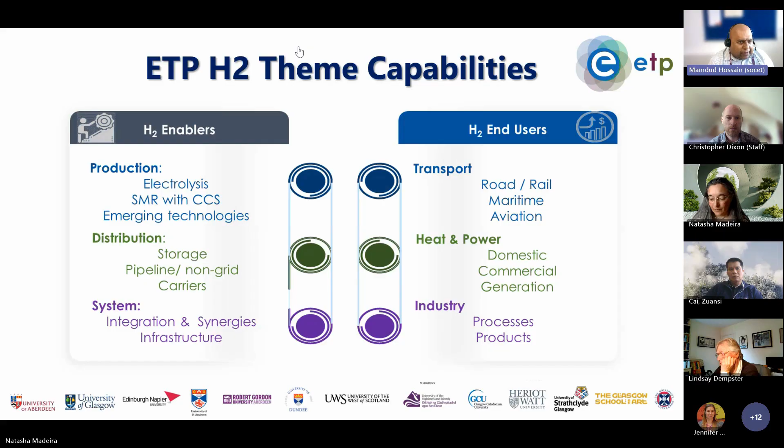In terms of my research at RGU or Robert Gordon University, we have strong work on electrolysis, which is hydrogen production, supported by EPSRC. The project is called Metasys. Also, we have a large fund called High One project that is looking at testing facilities for pipeline or a storage tank or even electrolyzer. So it's the very end before certification. If you want to test your product, you can also come to High One through the testing facilities there. Okay, move on to the next one, please.

I don't know why that's not going down. All right. Okay. Thank you so much, Mamdud.

I'm just going to give a brief overview of the Hydrogen Innovation Programme. This is funded by the Scottish Government, and it comprises a funding pot for collaborative research projects with academics and innovators, either startup companies or small companies looking to move into the hydrogen space. The Hydrogen Innovation Programme has been around since January 2022, and it's just been extended to the end of June. We're looking after elections to confirm extension to the end of the financial year.

In the meantime, we're now opening an expressions of interest for anyone who's looking for putting a proposal for industry engagement fund application, looking for innovation business development support or funding brokerage support, and also looking for partnerships and consortia building for larger projects. So you can find the form for the expression of interest on our ETP Hydrogen Innovation Programme webpage. We'll send all the links out after the event as well, so you'll have all of that to hand.

So just as a quick synopsis, the role of the innovation programme is to support the hydrogen academic theme group, Mamdud, and the representatives from all universities, looking at cluster building, so developing the innovation community that we have here in the webinar and broader across Scotland, supporting the pathway to commercialisation and internationalisation, supporting incoming missions from other regions, funding brokerage and consortia building for projects, and the general hand-holding for research and innovation and research and development support.

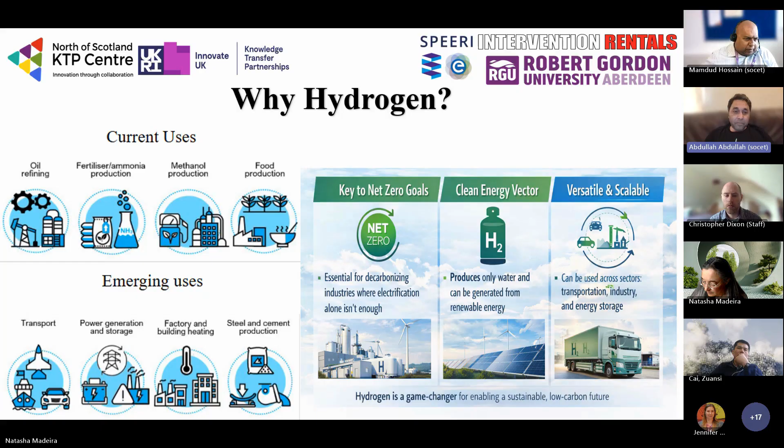So it's essential for decarbonizing industry where electrification is not enough. It can be produced from water and can be generated from renewable energies, which are abundant in nature. And it can be used across different sectors, so it's versatile and scalable. So that's why hydrogen is very promising, and it is the future economy, what researchers believe. Next slide, please.

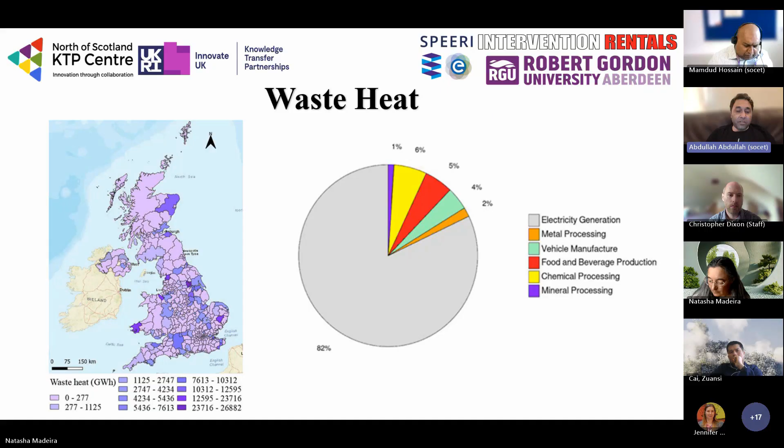So we look at the map. So this is Aberdeenshire. Scotland itself has a lot of potential of waste heat in gigawatt hours. So there's a lot of waste heat available, and we need to utilize it for commercial application, to ensure sustainability. Can we go to the next slide, please?

So again, here, if we look at Aberdeenshire itself, it has a lot of potential of available waste heat. And if we go to food and beverages, again, Aberdeenshire has many different food and beverage industries, and it has a lot of potential. So we can utilize that waste heat and produce green hydrogen. Can we go to the next slide, please.

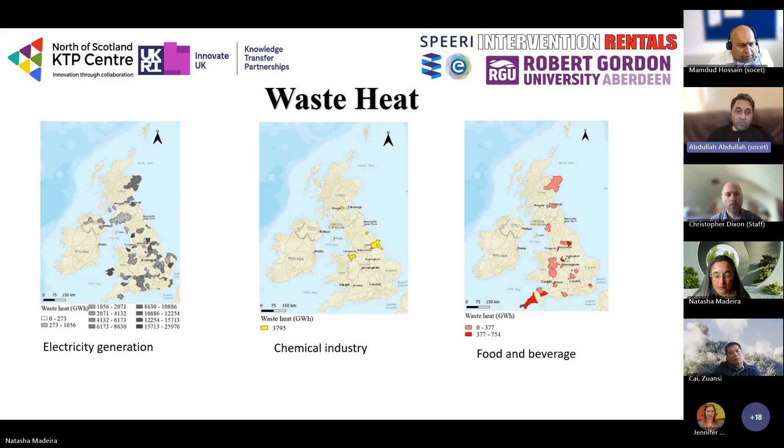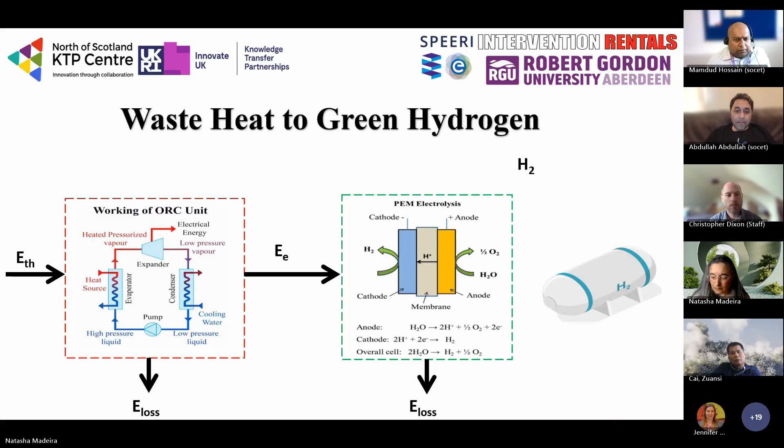So this is a little of what we are trying to achieve. What we are doing is some mathematical modeling that maps available waste heat sources across sectors and forecasts the required hydrogen system size. This helps determine technically viable deployment strategies and key performance indicators.

The next thing is the use of artificial intelligence and optimization. AI can be utilized from real data across sectors to improve predictive accuracy of system sizing and system performance under different operating conditions, because the intermittent nature of the renewable source of heat itself makes it complicated to design an integrated system. So we identify optimization opportunities from the heat to hydrogen conversion process.

The next thing we are aiming for is predictive maintenance of real plant operation. So how can we utilize artificial intelligence to efficiently operate the plant, and at the end increase efficiency and reduce the cost of the hydrogen produced.

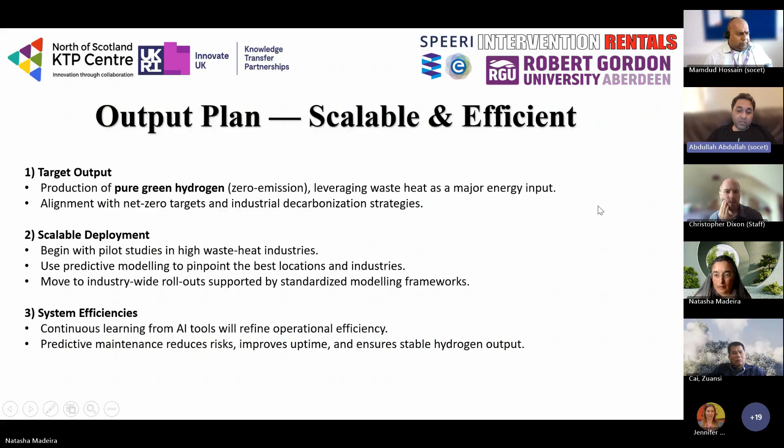For RGU, RGU is continuously involved in different aspects of hydrogen research under real-world conditions, establishing industry partnerships, improving impact pathways, and training next generation engineers in cutting edge technologies.

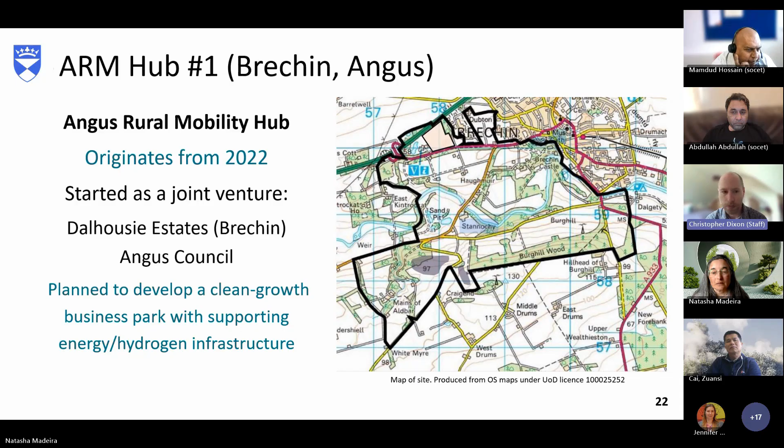We started off with quite a diverse plan, handled by the master planner consultants. They had a broad range of ideas, trying to stretch this out and see what they could actually do on the site. This image is overlaid on top of that little ARM Hub site patch. The main theme was going to be about HGV refuelling—we're just off the A90, trying to pick up fleets of HGV vehicles. The council was also interested in buying hydrogen-powered refuse collection vehicles, so there was a broad range of ideas as to where this hydrogen could go if we could generate it on the site.

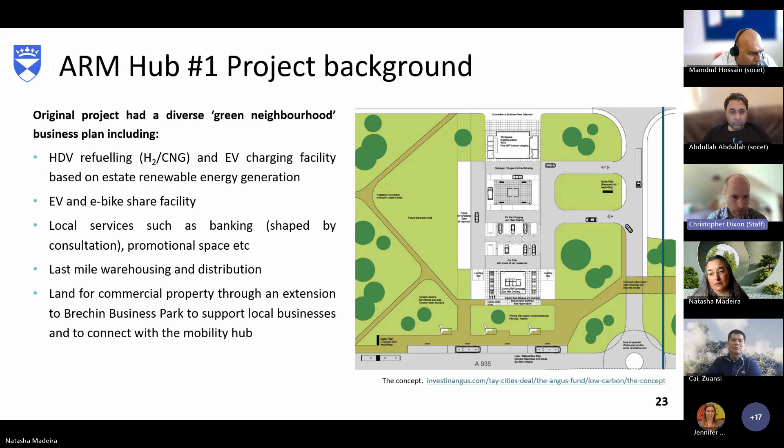The first ETP project was under KEN 3, the Knowledge Exchange Network. We did that with a local energy consultant, and the main idea was to see what they could actually do on the site—what were the constraints, and what scales of generation we could have for renewables to create green hydrogen. One key theme was to build a toolkit, because the estate had a vast estate of land there and elsewhere, and they wanted to see how this could be rolled out to further projects, either their own land or other land, via the consultant, who was very interested to get our help to project this forward. So the key thing was that it was like a transferable skill—the toolkit was useful for the consultant to take on and maximize the transferability of this funded work. Unfortunately, the first thing we discovered was that the grid was constrained, as the local distribution grid was constrained, which put a big damper on the whole project—probably the biggest challenge we had, and it's quite common now in a lot of these rural sites. But we developed the toolkit and handed it over to the estate, and that led into the second project.

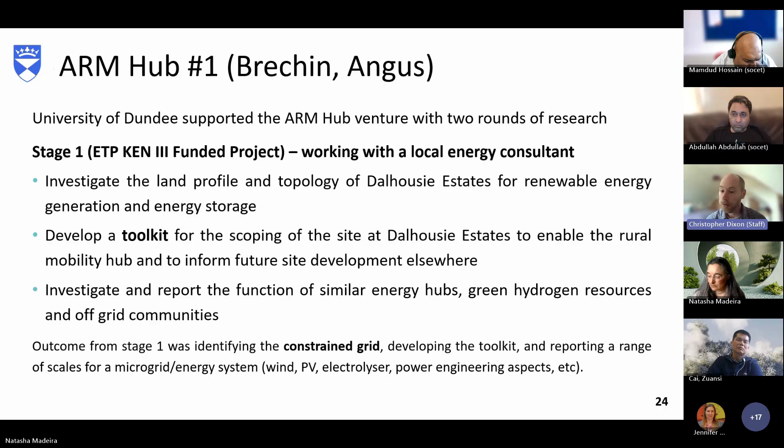So this was under the HIP, the Hydrogen Innovation program, I guess. Sorry, I got that wrong. Hydrogen Innovation Program. That's right. Thank you.

This was one of the more recent funding rounds, and we extended the project with the master planner, a new consultant, to really crunch numbers. We wanted to build a theoretical model they could use to simulate different ranges of generation, demand profiles, and storage, so they could see a layout of how they're going to get enough hydrogen to serve demand, and how it's spaced out over the seasons.

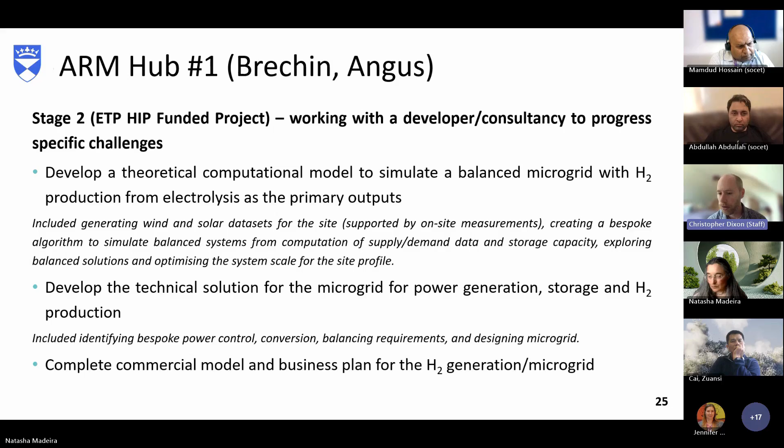So we had to access quite a lot of data to generate a monthly, weekly plan of expected hydrogen production throughout the seasons. We brought in scalable factors for storage, different types of turbines and PV, etc. Alongside that, there was work done on the commercial aspects of it. Next slide, please.

Solar is obviously a lot easier. So we had some confidence in the data going back, I believe, 20 years. We were able to access half-hourly values of solar irradiation and something similar for wind, so we could see how the daily, hourly, monthly, weekly changes in generation are likely to affect the site in terms of having a constant output of hydrogen. Can they actually achieve that, and what would be required, and what are the challenges in these different trends?

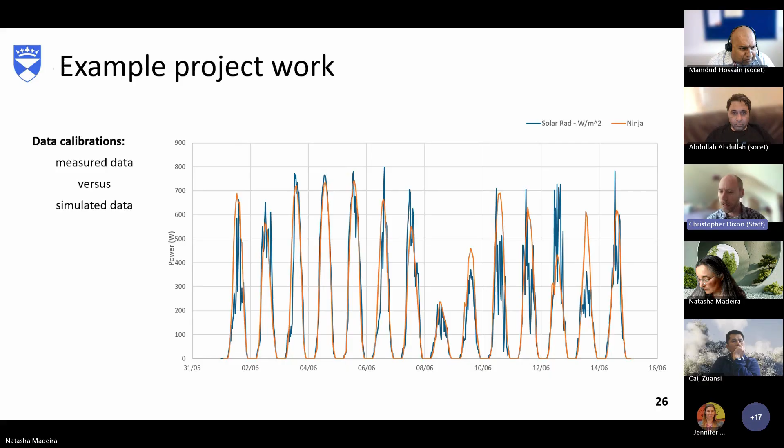Next slide, please. This next slide shows some of the outputs from the model. We built a series of graphs and a relatively user-friendly model for the team to use, where they could just input numbers. They could select a turbine, a size of storage, and a PV array. They had room for roughly 4 megawatts of wind and about 2 megawatts of PV, so plenty of space. Unfortunately, the grid wasn't on their side.

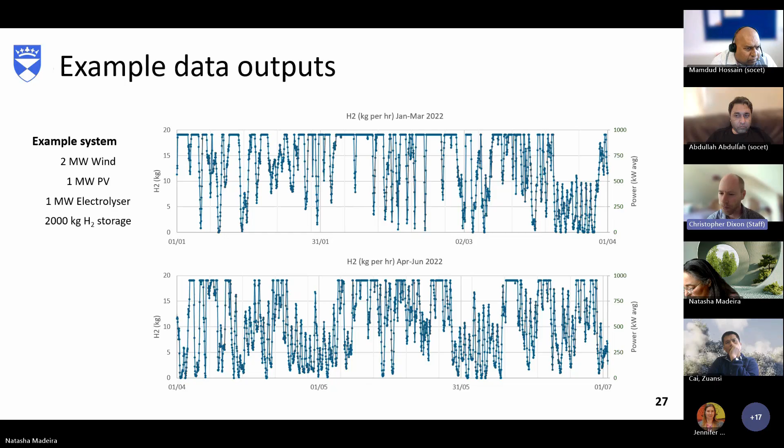So we looked at different scales and crunched numbers for them, giving them a whole printout of different scenarios, so they could see how it would fare across past years. Now, we can't say what it's going to do this year or next year, but we can say what it would have done had it been on the site in these previous years. They could see the monthly trends and typical outputs they're going to get, and where the pinch points and stresses in the system are. Next slide, please.

This actually led on to some other work, a slight extension from the original ETP work. This is something myself and Steve Reynolds, one of my colleagues, worked on alongside this project until quite recently. We looked at the idea of filling HGV vehicles. Now the biggest problem is if a fleet of vehicles turns up asking for hydrogen and you haven't got it. That was one of the biggest problems for this site.

We modelled different demand scenarios, and we also modelled when it's likely that there's going to be a fill failure, as in an HGV turns up and there's not enough hydrogen to refuel it. That was one of the biggest challenges.

So we took a great big array of data and looked at how we can balance the actual design of the system to minimize that, and what are the likelinesses, how do we get rid of that likeliness of fail. So this was a slightly different bit of work.

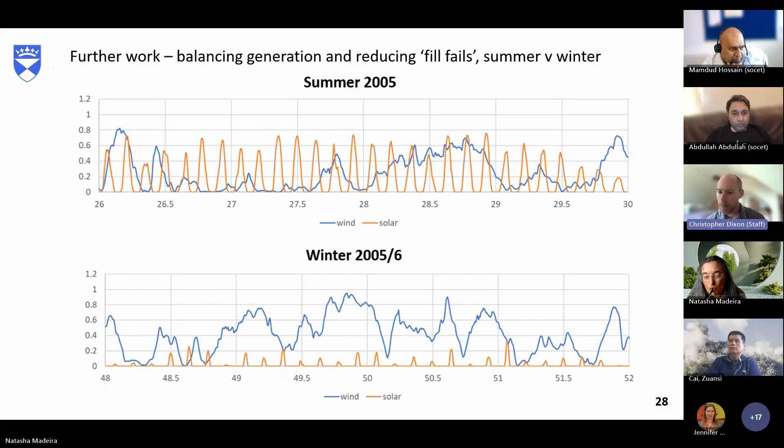One of the simple things we got from this was just how do we scale the wind and the solar. The ideal factor was around about 1 unit of wind to about 1.45 solar on that particular site. Now, of course, there's a lot of practical factors - it may not be possible to actually achieve that, but that would be the sort of target unit sizes to get this to operate with a roughly balanced monthly generation of hydrogen, and that allows us to commit to a relatively stable output to the demand.

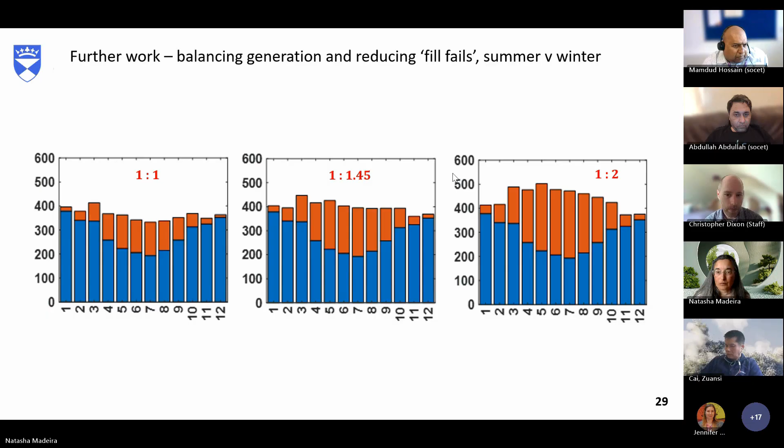So really, just to summarize some of the work we did and what came out of this - a lot of it was desk-based computational, so we were crunching numbers alongside a consultant who was doing the business and planning aspects. We obviously spent quite a lot of time up at the estate doing land surveys. We set an anemometer up on the site to verify our data. So the key work was trying to build a data set and forecast the hourly or half-hourly energy on the site, and process that data and talk about some of the power systems engineering.

So how are we physically going to build this microgrid? What are the components? What are the restrictions to connect cables from one site to the actual demand? And just to explain how this all comes together, what are the sort of subsystem dynamics in terms of storage, if there is any, pumping gas into a tank, and the dynamics of the electrolyzer, the wind, the solar, etc. Tie it all together, and obviously discuss some of the control system requirements, which is quite bespoke in these cases.

So yeah, we used historical data, and the idea was really just to refine their plans, to refine their projects, so that they could pick a reasonable scaling factor for all the parts, and how much hydrogen they're going to get. Our calculations, based on a range of different scenarios, was around about 50 to 90 tons per year, which was kind of entry level for them.

And I guess some of the key things was keeping a very diversified plan, so having lots of avenues they can go down, and looking at where the levers are, where can they make money from this project. And obviously the key problem was the grid that was constrained, and that really put a massive hold up on the project. Next slide, please.

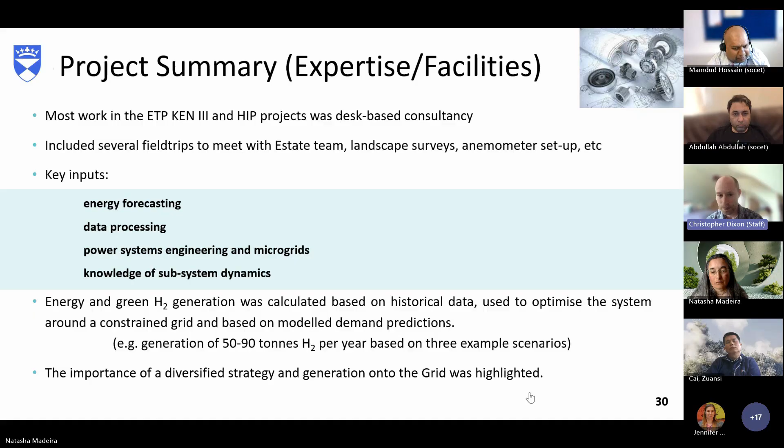Yeah, so actually, having looked at various other rural ventures and had some involvement in them, the grid is the number one problem. So if you have a 2-3 megawatt grid connection, you can generate relatively cheap electricity relatively easily, get your wind turbine and PV up and running, build a business out of that, get them churning out cash, and then you can tap into that relatively low cost energy source with an electrolyzer, and you just have to scale it correctly, and you can make that work. But without the grid, it's very, very difficult to balance energy. And we looked at how that might be possible - that was one aspect of the work, in scaling the system and building strategies to balance the shortfalls within a reasonable plan.

So that particular project, sorry, if you go back one slide please - that particular project carried on. We're sitting on the back of it now. We're not working with them directly, and they've changed their course slightly. Unfortunately, the original funding was just under £6 million they had for this project, timed out because they couldn't spend it fast enough, mainly because of the grid. The grid connection wasn't there, and that made a lot of challenges with making this work. And the local council, Angus Council, took the money back and have now projected this forward into a new project. So the ARM Hub 2 is now up and running, or I should say it's in planning stages, and they're working with a new consultant planner for that, and we've been in touch with them as well.

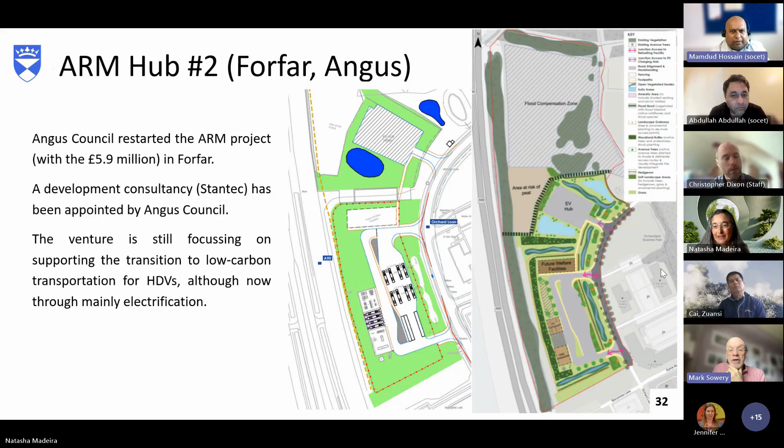Great work. We'll move on to Zuansi just now, and if there are any further questions, we can bring them back into the final session. Sure. Go ahead.

Good afternoon. My name is Zuansi Cai, and I'm associate professor in energy and environmental engineering. My research is mainly working on modeling underground hydrogen storage and intelligent renewable energy systems. And today I'm going to talk about three projects, funded by the Royal Academy of Engineering, the Net Zero Technology Centre and Centrica Storage.

So when you look at the UK, we are leading in wind energy installation overall, onshore and offshore. So far it's 16 gigawatts now; on the left-hand side onshore, on the right-hand side offshore. Next slide, please.

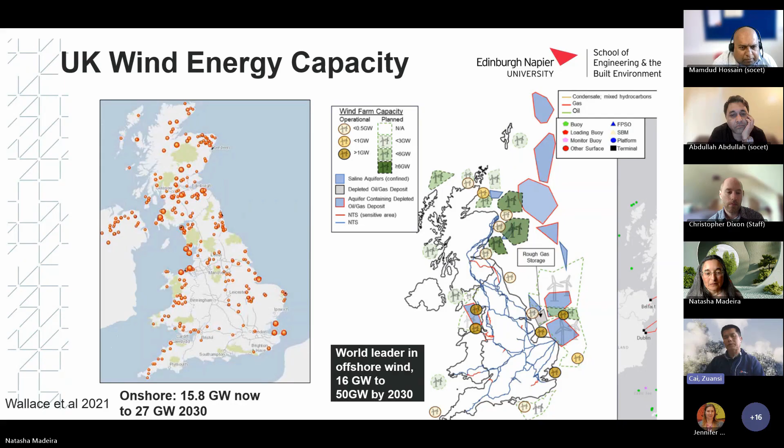So when you look at that, we have plenty of installation of wind, but if you look at our study, in 2020 the curtailed energy was just 4 terawatt-hours. In 2025, it's 10 terawatt-hours now. It costs about 400 million, and 98% of wind energy is curtailed from Scotland. Because we curtail the energy generation from the north and the south generates the electricity, the total cost is over £1 billion per year.

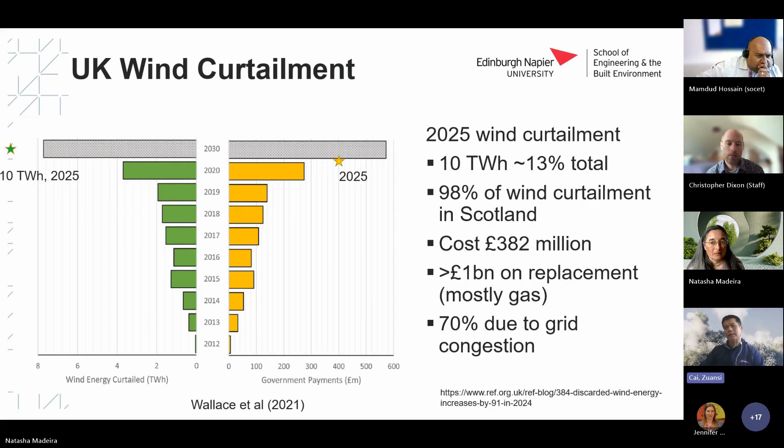So our study says, okay, if we have huge curtailed energy, can we convert this energy into hydrogen and store it in the subsurface? Here is a technology proposed to use wind energy to generate green hydrogen. Once you have vast hydrogen generation, it's possible to do seasonal storage and store the surplus energy from summer to winter. We can leverage the depleted oil fields in the North Sea as a storage facility. And next slide.

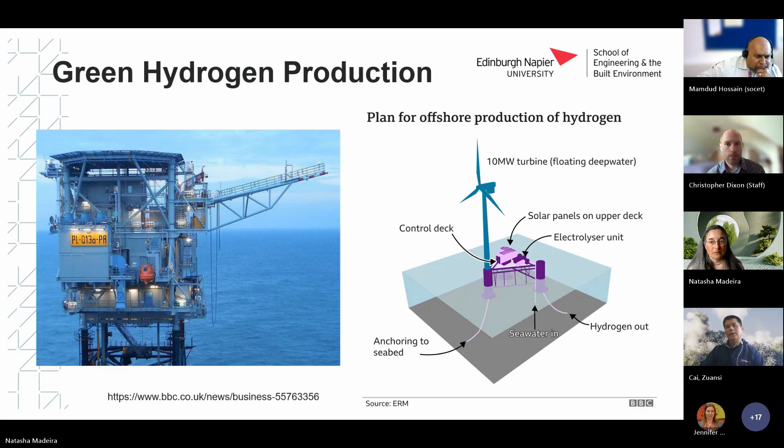So when you look at underground hydrogen storage, there are three typical cases. One is in a salt cavern. It's quite a mature technology, but it's mainly for compressed air storage, on the left-hand side. The second one has never been used for hydrogen storage. That is depleted oil and gas fields. And today my work is mainly focused on the depleted gas fields and the salt caverns. Next slide, please.

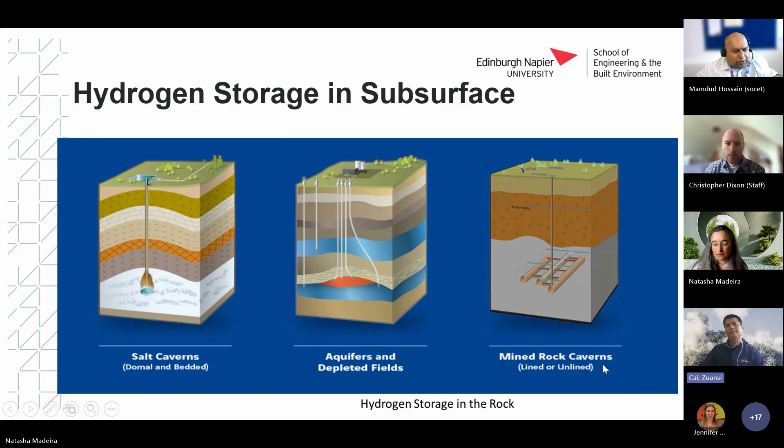So when you look at the underground hydrogen storage potential offshore, on the left-hand side, we have a lot of depleted gas and oil fields, and at the same time, there's a lot of installed or planned wind energy. The middle chart is the existing gas pipelines, which maybe can be repurposed to transport hydrogen.

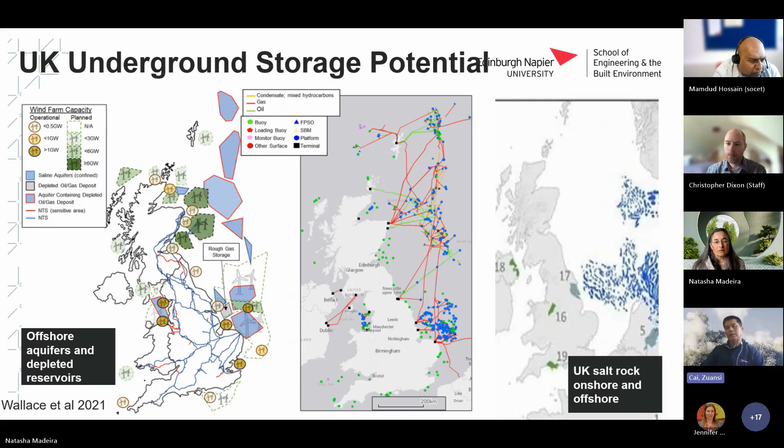When you look at the right-hand side, one is the salt caverns offshore. The dashed area is just east of Hull. There's a huge salt geology. Salt geology can develop salt caverns offshore, but there are also some dots onshore as well. So there are two potentials: one is depleted gas and oil fields, and one is salt caverns. Next, please.

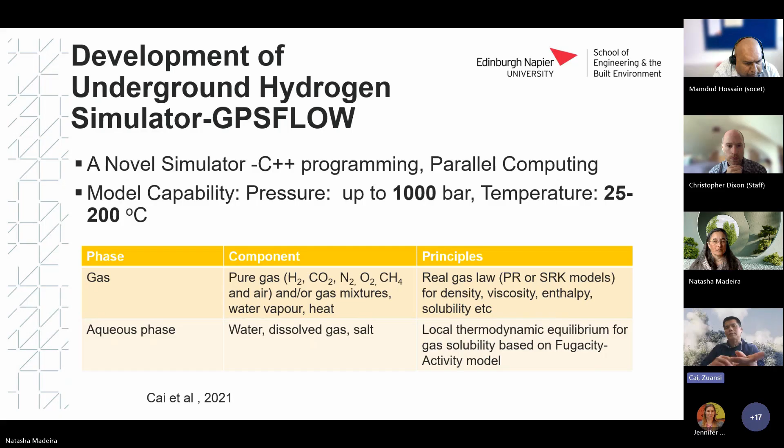So to be able to do this simulation, we got funding from the Royal Academy of Engineering. We developed a field scale, reservoir scale model. This model is called GPS flow. It can do parallel computing, pressure up to 1,000 bar, temperature from 25 to 200 Celsius. You can do pure gas and gas mixtures based on the real gas law. We have published that; if you're interested, the reference is there. Next slide.

Especially for the gas mixtures, we did a bit of validation, looking at the thermal properties of the different gases in the subsurface. We're quite confident with the model validation. Here, this is again some of the laboratory work. Next slide.

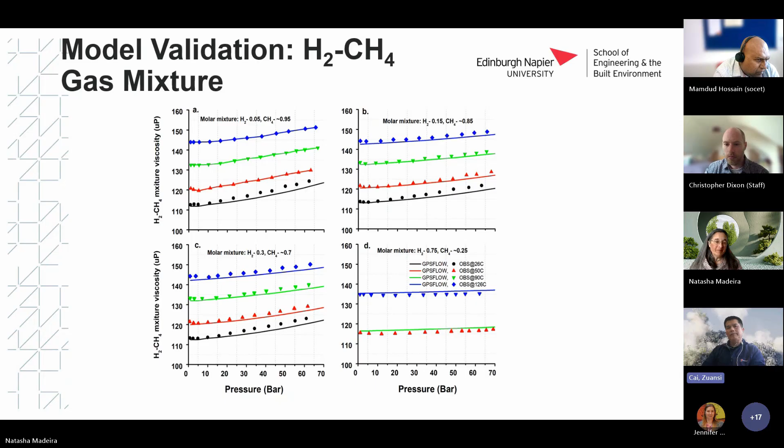Once we have this model, we want to deploy it in a real world application. That is a collaboration with Centrica Storage Limited, because, as we probably know, Centrica Rough is the largest underground gas storage for the UK. And they were thinking about repurposing Rough as a hydrogen storage facility in the future. But they have three questions we need to answer first.

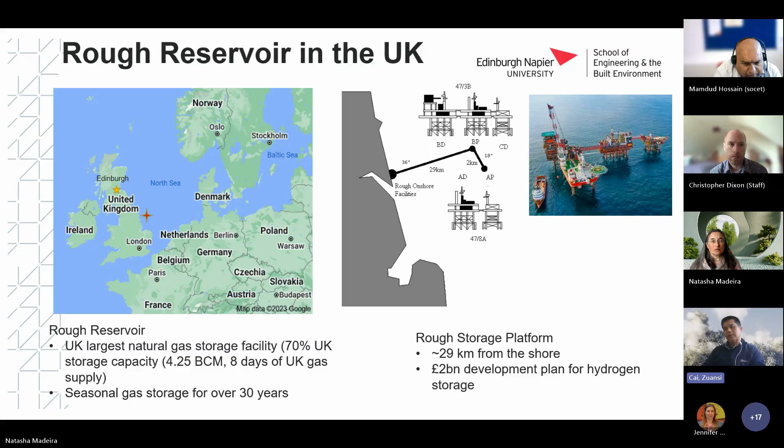First question is, what is the potential storage capacity for hydrogen? Second, because it's a depleted gas field, what is the quality of the gas in the production from the storage? The third one is, can you use CO2 as a cushion gas for the storage? So next slide.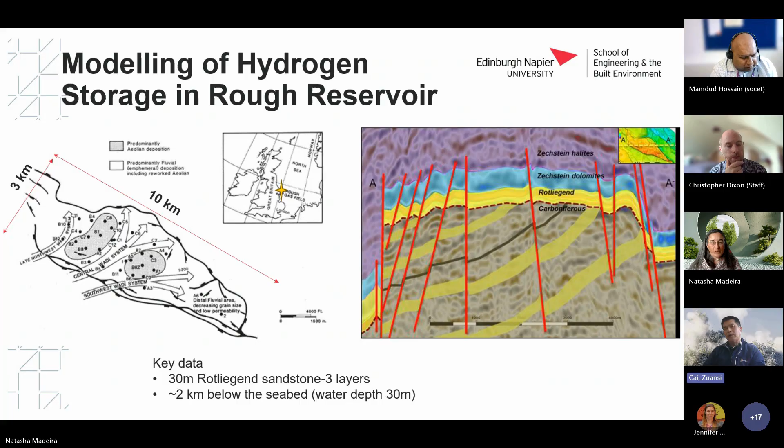So here on the left-hand side, the figure is the Rough reservoir, about 10 by 3, but the reservoir is about 30 meters thick. It's not a very thick reservoir. On the top, there's about 800 of salt overlay, so it's quite a tight reservoir. Next slide.

Okay, and we got an animation as well. Can you click at next slide again?

Yes, okay. So this is the simulation. We've used the Rough 12-well simulation, using injection and extraction, and we do simulation for that. We look at the quality of the hydrogen generation. So overall, we have a volume percent of about 98% purity of the hydrogen. Of course, we got methane from the natural gas in the mix. Different wells have a different quality because of the heterogeneity.

But overall, we simulate based on the pressure provided by Centrica, and we can store 42 terawatt hours of hydrogen. For the working gas, because the Rough is interseasonal storage, we just inject and extract once per year. So the working gas capacity is 18 terawatt hours. But you see of the 42 terawatt hours, the 58% is hydrogen as cushion gas.

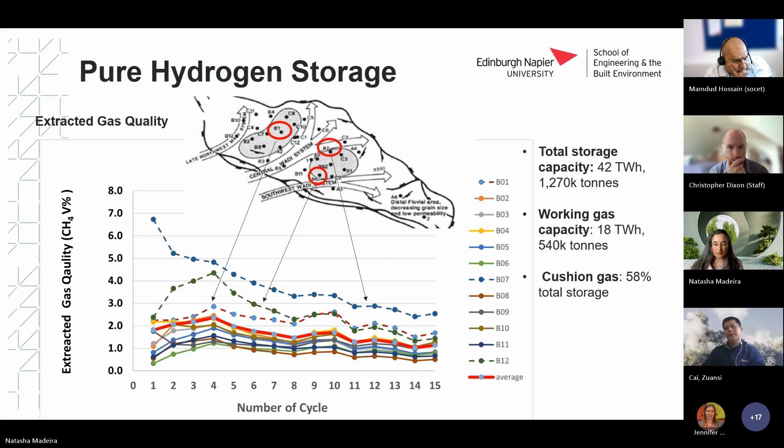Next slide. Next slide, please. Okay, so because, and check it again, please, Natasha. Okay, because, no, and move back, please, that's okay.

Because the simulation says we'll have about 60% of the hydrogen as cushion gas, which won't produce any revenue. So Centrica said, can we replace these 60% of the gas and use CO2 as a cushion gas? But if you inject CO2 as a cushion gas, you're interested in what the extraction gas quality is. If you look at the left-hand side, of course, when you use CO2 as a cushion gas, it will compromise some of the gas quality.

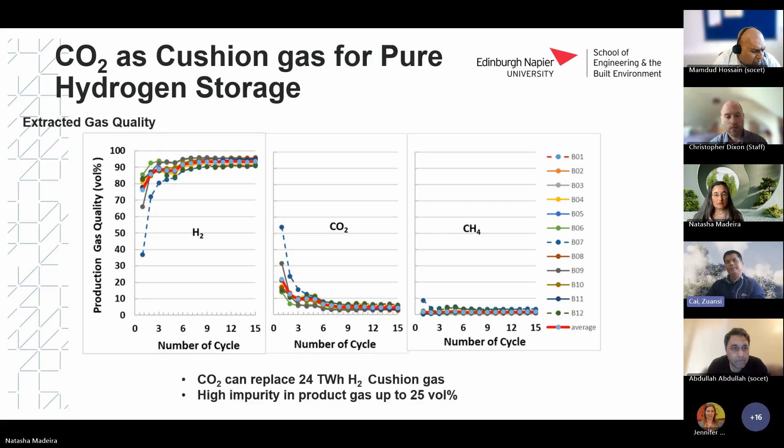At the initial few cycles, the gas quality is about 80%, but it gradually increases to about 90%. That is what we have in here. So the simulation shows CO2 can be used as a cushion gas, but will compromise the gas quality in the production. Next, please. Next slide, please.

And we also use this model to do hydrogen storage in the cavern, not only hydrogen, but also other gas mixes: 80% methane and 20% hydrogen, or pure methane. And we look at the pressure evolution and the energy storage capacity of different types of gas. Next slide, please.

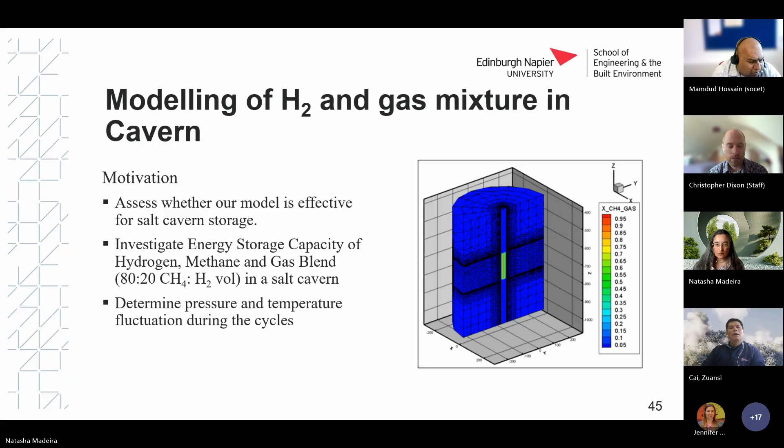So here in the simulation, we look at the gas pressure and temperature fluctuation in different gases. The reason we look at the pressure and temperature fluctuation is because they have implications for the integrity of the cavern. Because if you overpressure or the temperature is too high, it can melt the cavern and cause leaking.

The results show hydrogen has the greatest range in terms of pressure and temperature fluctuation for each cycle. The storage also tells us that if you have the same cavern and want to use it to store hydrogen, you can store just about 1/3 of the energy compared to natural gas. That is a key takeaway from our simulation. The next slide, please.

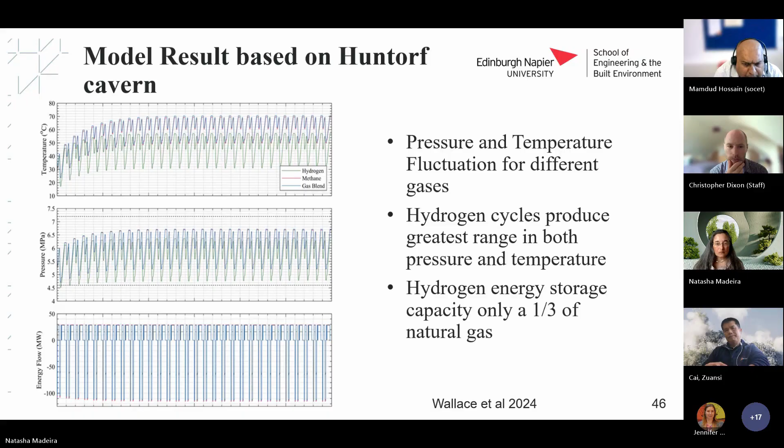Just going to wrap up today's presentation. We tested the new simulator and it can successfully model hydrogen underground storage in the depleted gas field and cavern. For the Rough, the total storage capacity if we use hydrogen is 42 terawatt hours, and each year you can cycle the working gas at 18 terawatt hours. Yes, CO2 can be used for the cushion gas for the Rough and save a lot of money, but eventually will compromise the hydrogen quality in the gas production.

So if we have a cavern originally used to store natural gas and want to switch to store pure hydrogen, you probably expect your storage capacity is just 1/3 of the same cavern. This means perhaps potentially reduced revenue.

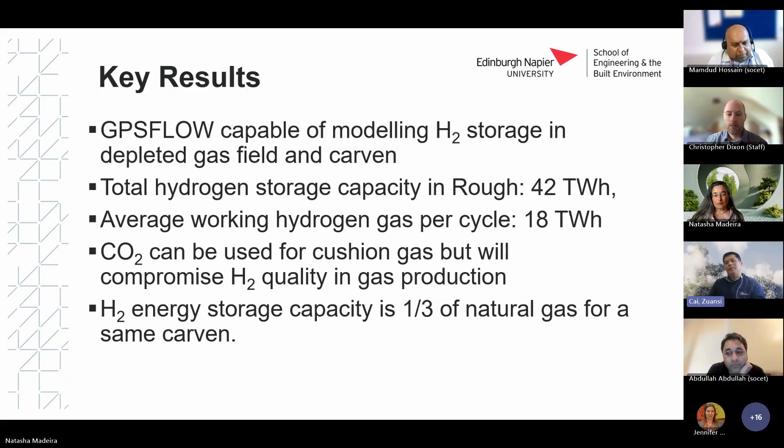Very good. Another question is: what are the mitigations to minimize hydrogen leakage from storage solutions and hydrogen distribution? That is a very hot question, honestly. But given Centrica's storage has been a storage method for 30 years, of course, hydrogen is a small molecule, that's true.

But yes, there's a potential leakage, but one of the leakage reasons is because you need to select a suitable site. You probably have to have a proper test before conducting this hydrogen storage. It is one of the tasks. Centrica storage also wants to look at that as well. That's true, it's legitimate. You have to do some of that before you use any site for hydrogen storage. You have to do a bit further testing. That's my answer.

And final question, Abdullah, you can ask directly if you are interested. Okay, first of all, thank you for such a fantastic presentation, it was very knowledgeable. My question is a very generic and general question: what is the expected storage efficiency of underground storage of hydrogen?

If you look at the storage efficiency, it depends. If you look at the Rough case, if we don't use CO2 as a cushion gas, the efficiency is about 40% of the storage gas that can be used as working gas, but the other 60% of hydrogen has to stay in the reservoir to maintain the pressure. But if you use CO2, you compromise the gas production a bit, but storage efficiency depends site to site. Based on our study for the Centrica, maybe you can use about 80% of the storage in the reservoir as working gas.